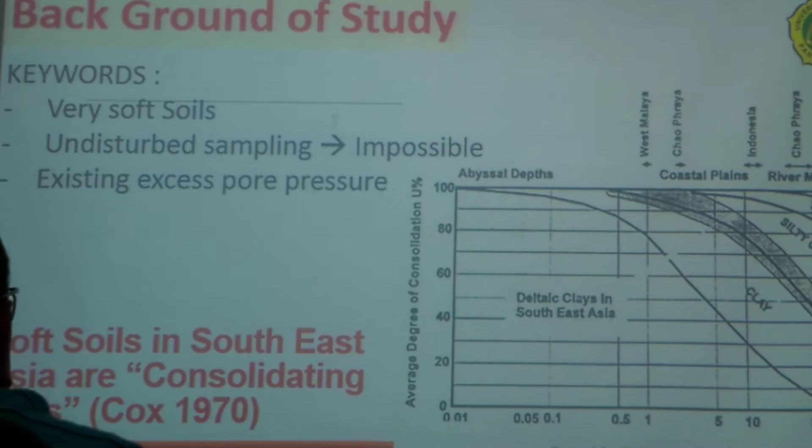Cox did a lot of data collection, even from West Malaya, from the Chao Phraya River in Thailand, in Indonesia, even in Burma on the Irrawaddy River.

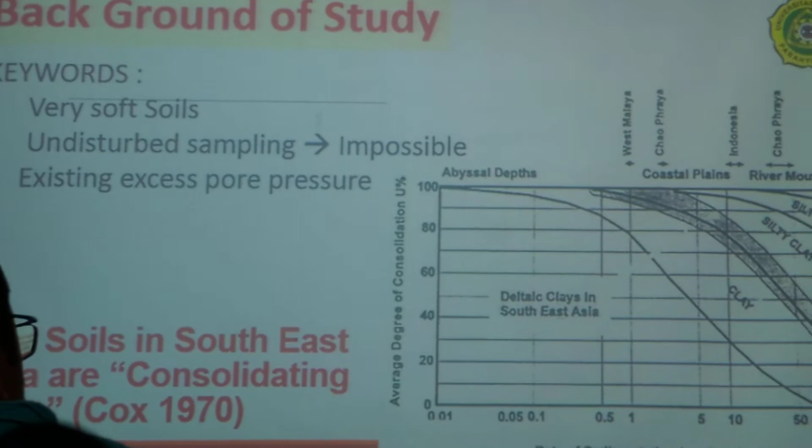What he found out is, if he plots the rate of sedimentation versus the degree of consolidation, he found that in some areas it is still consolidating. If the sedimentation is clay, let's say in Indonesia, what will happen?

Let's take the middle of this. Let's say the rate of sedimentation in this specific area is 10 mm per year. We found the degree of consolidation is only 50%. Only 50%. So why is that? It has been there for thousands of years, but still consolidating.

That is why in some areas like Jakarta, Semarang, Surabaya, Cirebon, the land is now subsiding. In Semarang city, for instance, the soft soil is 30 meters deep. Until now, it's still consolidating.

In the year 1980, I went to Semarang. In the area of Marina, it was dry. But if I go there now, 40 years later, the water is about my knees. What does it mean? It means the land has subsided by 50 centimeters. So now the land is underwater.

So Semarang city is having flooding every day, 2 times every day. It is the flood due to the rise of the water, or sea level. So every day. That is interesting.

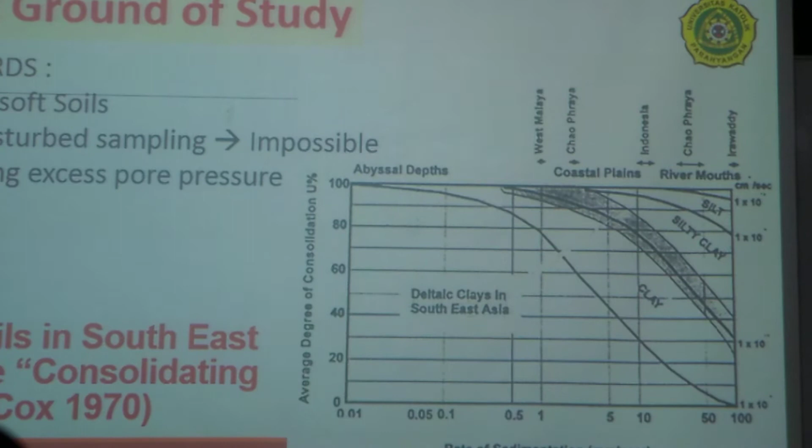Let's do it. So we have the problem with the existing compression. Now let me mention what is the theory behind that.

In consolidating soil, there is still existing pore pressure. It could be due to its own weight during sedimentation. It could be because of fill placement, like in a reclamation area. It could be due to pile driving. But the pore pressure is there.

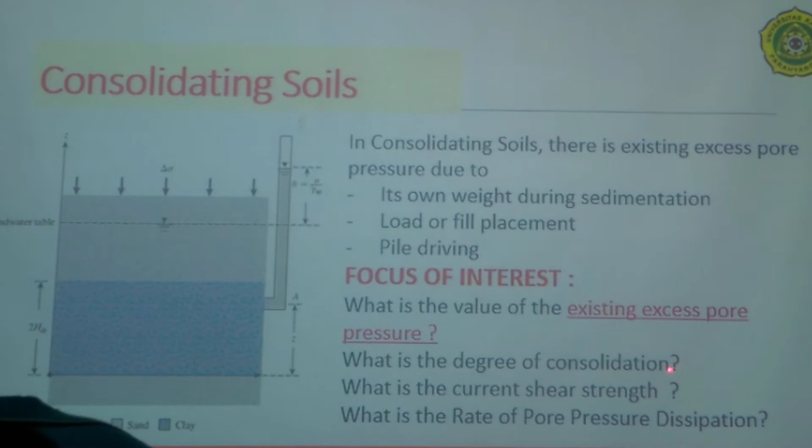The interest is, we want to know what is the existing pore pressure, because if we bring the sample to the lab, we don't see the existing pore pressure anymore. What is the degree of consolidation, so we know when we can construct the road, for instance, to avoid damage due to consolidation? What is the current shear strength?

Because I tell you, the lab doesn't tell you the truth. What is the rate of pore pressure dissipation? So all these things must be answered.

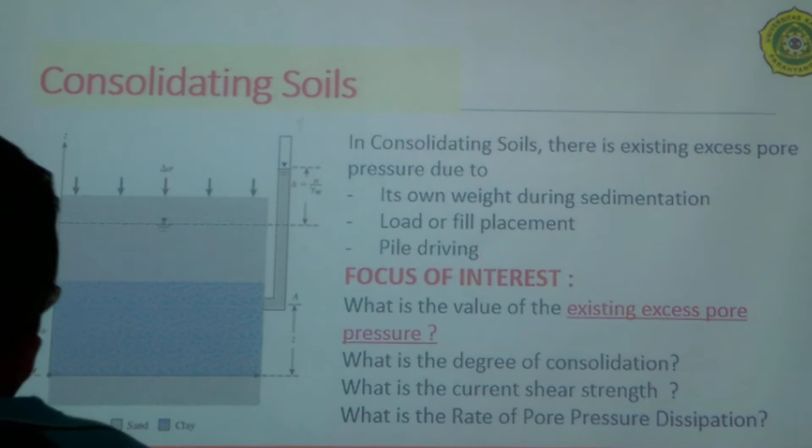So this is the illustration. If this is the soil, the soft soil, the pore pressure is there. The groundwater is here. So that difference is what we call the excess pore pressure.

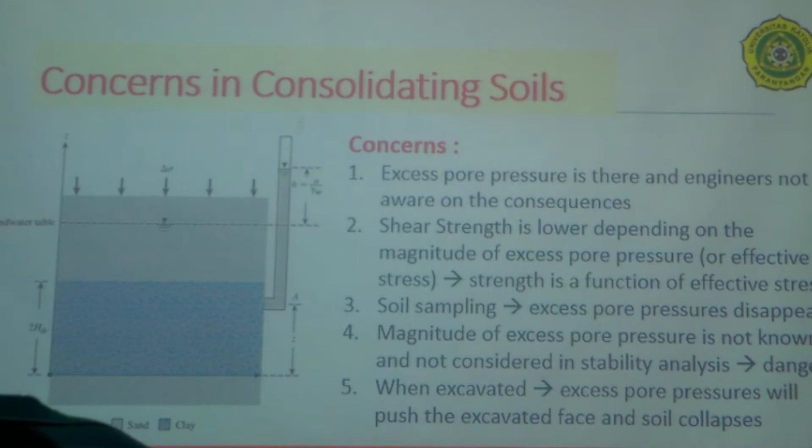The concern is the excess pore pressure is there, but the engineer is not aware of the consequences. When he constructed the sheet pile and did the excavation, suddenly the sheet pile collapsed. Why is that? Because they do not take into account the excess pore pressure, and by mistake, they use higher shear strength.

So we need to know what is the excess pore pressure. Second, the shear strength is in fact lower depending on the magnitude of excess pore pressure. Remember, the strength equals effective stress times tangent phi prime. Effective stress means sigma minus U.

Sigma is the total stress, U is the pore pressure. But we don't know the pore pressure. We always assume the pore pressure is the same as hydrostatic, which is wrong. So we say, because of the effective stress being small, the strength is also small, because the strength is a function

of effective stress. Remember, in Jakarta, Surabaya, in Java, and even in Kalimantan, the ratio of the shear strength divided by the effective stress, SU divided by sigma V prime, equals 0.22 in Jakarta. I don't know in Malaysia. In United States, SU divided by sigma V prime is 0.33, a different number.

And then Skempton in the year 1957 said SU divided by sigma V prime equals 0.11 plus 0.0037 times plasticity index. You remember that? You must remember that. So it depends on the plasticity index. The value of the ratio of SU divided by sigma V prime is a function of plasticity index. Anyway, in Jakarta, it's 0.22.

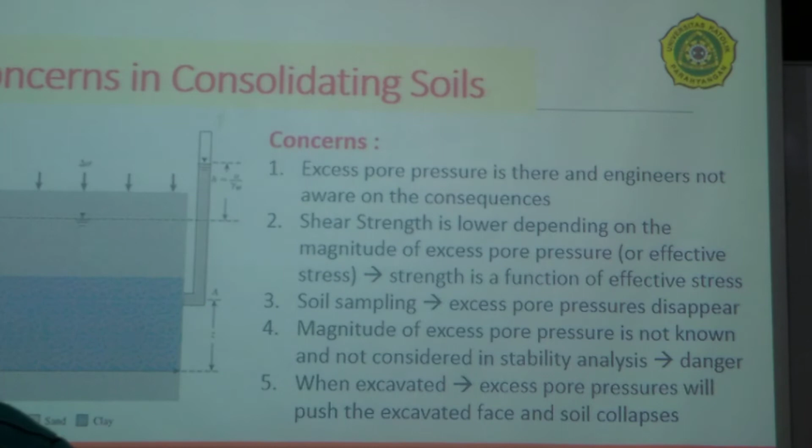So a lot of failure. When excavated, excess pore pressure will push the excavated face and the soil collapses. So this is our concern. So I want to help people find out what is the excess pore pressure.

Why did he think about it? Let me tell you the history. In fact, the history of this thing is to do the design for pile, because the tip resistance of the cone is assumed to be the same as the tip resistance of the pile. The friction, local friction, is the same as the local friction of the pile. That is the idea, okay.

Although that thing must be done correctly. Last time they used that, but it has to be corrected. But anyway, that was the first idea. So this equipment is mainly to design pile.

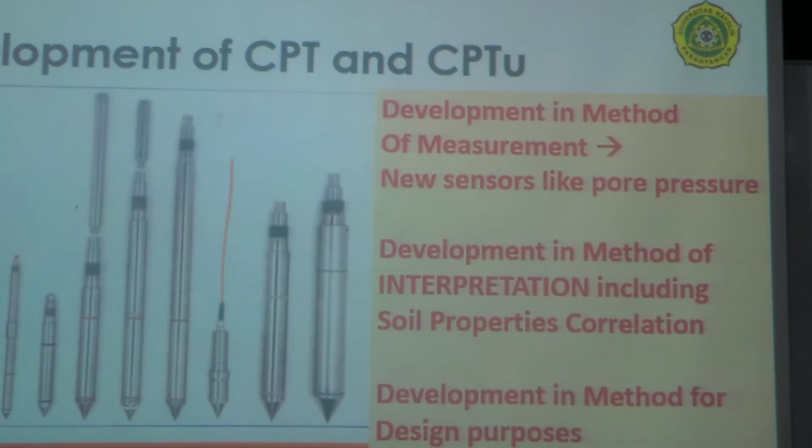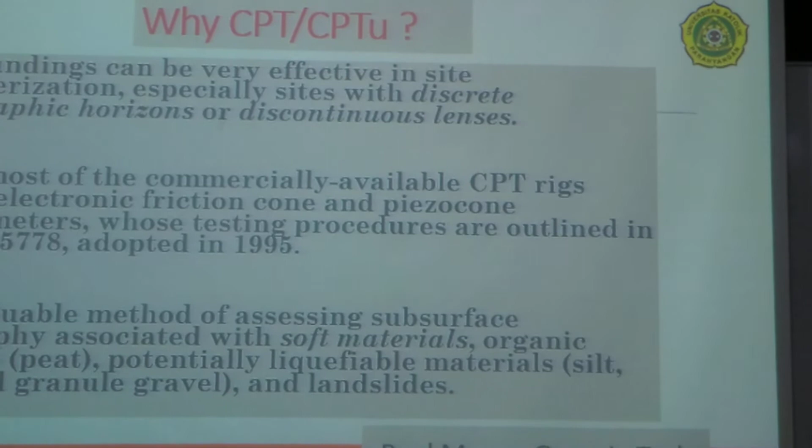The CPT sounding can be very effective in site characterization, especially sites with discrete stratigraphic horizons or discontinuous lenses. This test can be done every centimeter, the reading is every centimeter. So even if you have a very thin layer of lenses, 5 centimeters, it will detect it. But if you use SPT, the reading is every 1.5 meters.

If you miss it, well, I used the CPT to find out the sliding plane. I used SPT and it missed, because the sliding plane was between the two SPT locations. I went to the site, I checked every material, and I found that this is the sliding plane.

So how do you know that? Well, it is soft, very simple. It is soft and has a lot of water. When you have a sliding plane, it will have some kind of crack. Water will go through, so it will be soft and have a lot of water. But this has to be done by an expert, because if a non-expert does it, maybe he won't know how to find the sliding plane.

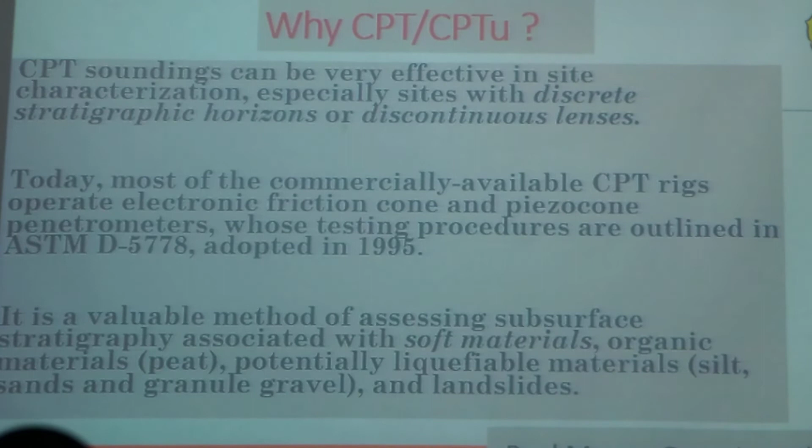I just quote this from Paul Mayne so that you don't accuse me that it's from myself. No, it is from Paul Mayne. Because from Paul Mayne you must believe. From me you don't have to believe.

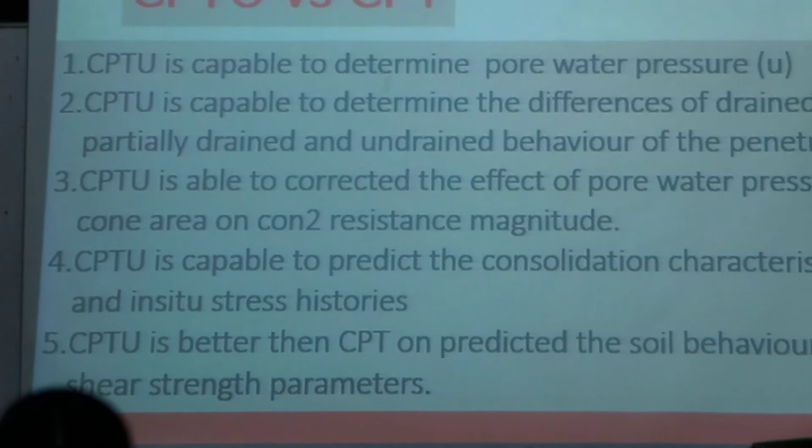What is the difference between mechanical CPT and CPTU? CPTU is capable of determining water pressure, CPT is not. Look at this: if you push the cone and the cone measures 10 bar, that 10 bar is coming from the soil grain resistance and the water resistance.

If the 10 bar gives you 9 bar of soil resistance and 1 bar of pore pressure resistance, good, the soil is okay. But on the other hand, if you have 10 bar where 9 bar is coming from water resistance and only 1 bar from soil resistance, what happened? That is under-consolidated, because the pore pressure is very high there. That makes the difference. But if you use mechanical CPT, you never know how much is carried by the grain and how much by the water. That is why CPTU is very different from mechanical CPT.

CPTU is capable of determining whether the push is drained, partially drained, or undrained. This is interesting: I show you in the dilatometer, when we push the cone in sand, no excess pore pressure, but in clay, excess pore pressure.

So we can know, if there is no pore pressure, it is drained. If you push the cone in sand, no excess pore pressure, but in clay, excess pore pressure, very high. So we know if it's drained or undrained, then we know the behavior of the soil. We don't need to know the type of soil, we need to know the behavior. This is one important thing.

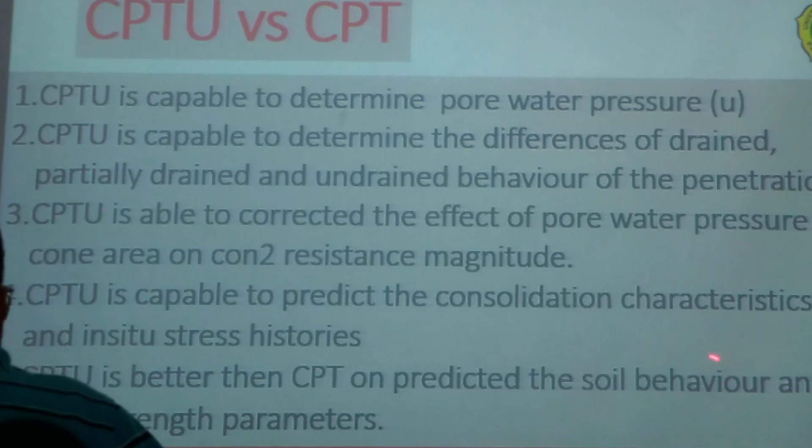CPTU is better than CPT... at predicting soil behavior, I say soil behavior and the strength parameter, of course. So there are many applications.

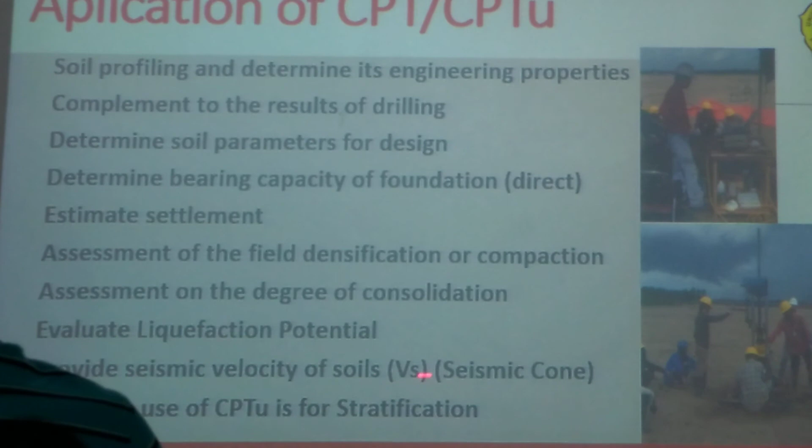I don't think I will show you one by one, but just mention: soil profiling, complement for the drilling, determine soil parameters, you don't need laboratory test, determine bearing capacity directly, you don't need C and phi, estimate settlement directly without any moduli, because moduli is there. Assessment of field densification, assessment of the degree of consolidation, evaluate liquefaction potential, provide seismic velocity, and stratification.

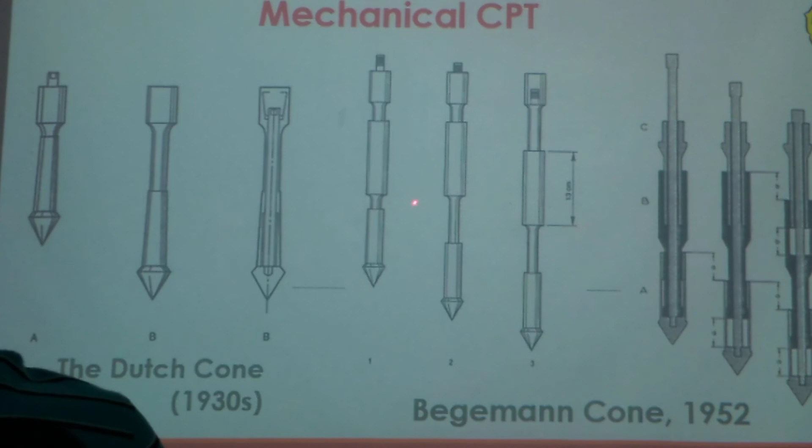Okay, this is how it operates. This is the one developed in Holland. You push the cone.